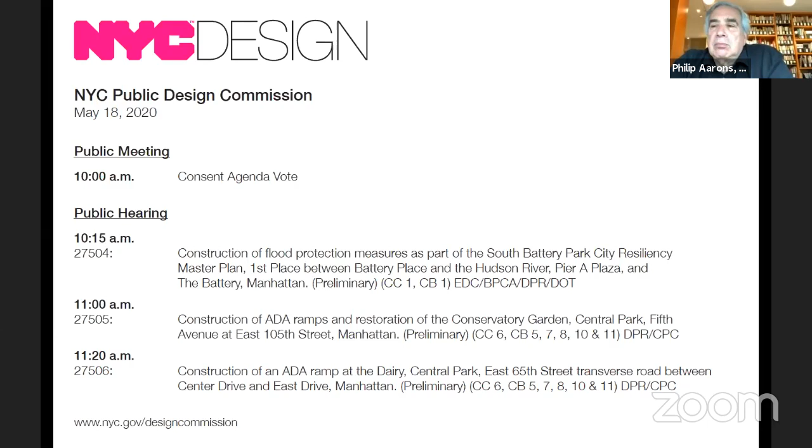So I will now go through another roll call for the vote. When I call your name, please say yes or no to the consent agenda. Phil, yes. Lori, yes. Manuel, yes. Richard, yes. Susan, yes. Ethel, yes. Merrill, yes. and Mary, yes. And I am voting in favor as well. So let the record show all in favor, and so the consent agenda is approved with the conditions and recusals noted.

So now we're moving on to the public hearing with item 27504, construction of flood protection measures as part of South Battery Park City Resiliency Master Plan. Commissioner Morgenthau will be moved to the waiting room as she is recused from this project. So per standard procedures, the applicants will give their presentation, then public testimony will be heard, and then the commission can ask questions, deliberate, and vote.

Hogan from AECOM, I've given you control of the shared presentation screen. Let me know if you see that. Yep, it looks like it says I have control. I'm just testing it out. There we go. Okay, yep, it works. Let me just, you have control of my mouse. Let me just mute myself again and then I'll give you control.

Can everyone else see this? It says, please move window away from shared application. I'm not sure. Is that on your end, Rebecca? I do not see that. Rebecca, do you have another window perhaps that's open on your desktop that's in front of the PDF? No, only the thumbnail of Hogan. Let's see. Let me minimize you and see if that works. Okay, it's showing on the live stream that there's an issue as well. Let me stop share and try again. Okay.

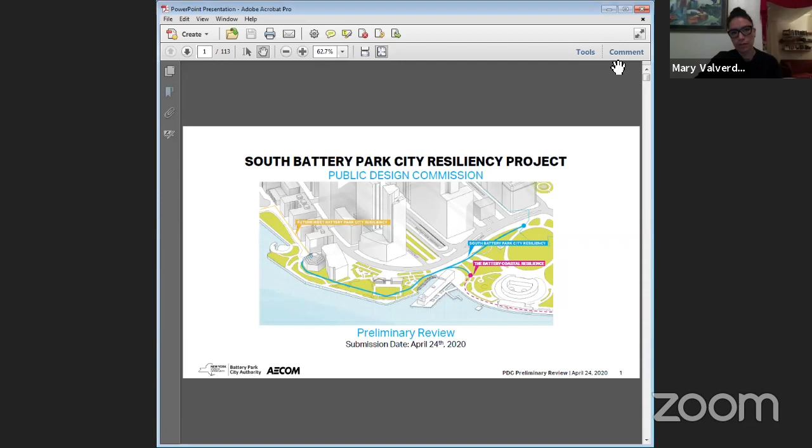Does that work? Does everyone see it? It's good. Okay. And Hogan, do you still have control as well? I think you have to give it to me again, just as I'm viewing. One moment. Okay, you should have control now. Okay, great. Let me just mute myself and then we are good to go.

Okay, well, good morning, everybody. My name is Hogan Edelberg. I'm a landscape architect with AECOM. I'm joined today by Jennifer Dudgeon and Gwen Dawson from Battery Park City Authority, as well as my teammates Heather Morgan and Luis Diaz, who are available for the question and answer period as needed. So we have a lot of slides to go through today, so I'll be moving relatively quickly.

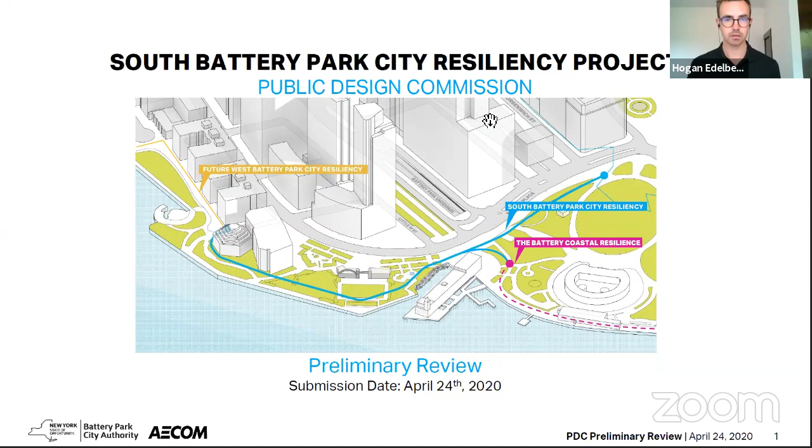So we'll be talking today about the South Battery Park City Resiliency Project. It's part of the Lower Manhattan Coastal Resiliency overall. You can see its location in relation to Lower Manhattan here on this slide. The South Battery Park City project extends into the Battery, where it connects to other resiliency projects, the Battery Wharf, and eventually the FiDi-Seaport Climate Resilience Master Plan.

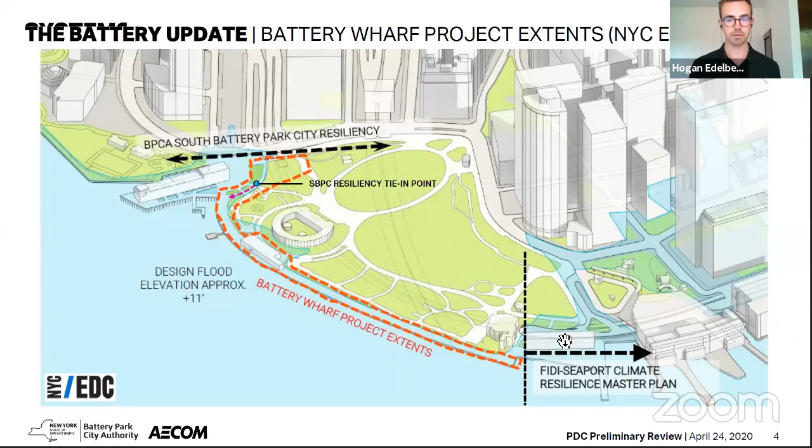Zooming in a little bit to the project location, we can see some of the main features: the Museum of Jewish Heritage, Wagner Park as it is today, Pier A, and the Battery on the right. Our project alignment is shown in blue here, and you can see the tie-in point for the Battery Coastal Resilience Project here.

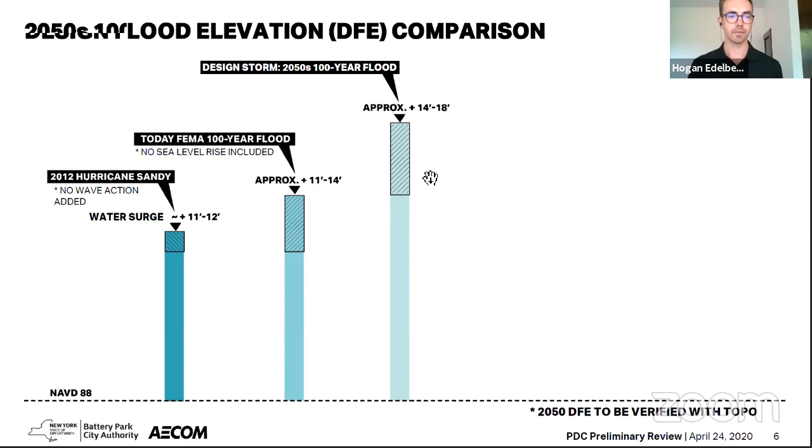So the challenge with this project that we'll be talking about today is how do we design for these risks, and how do community design excellence and climate adaptation coexist on this site. Obviously, there's a lot of factors that go into it.

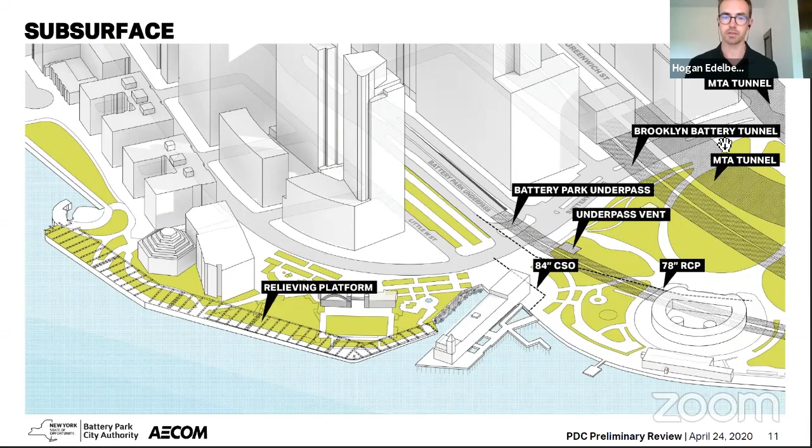Through Pier A Plaza, there is an 84-inch combined sewer outfall running just to the south of the Harbor House, the Battery Park underpass and the underpass vent, and further to the east, the Brooklyn Battery Tunnel and the MTA Tunnel.

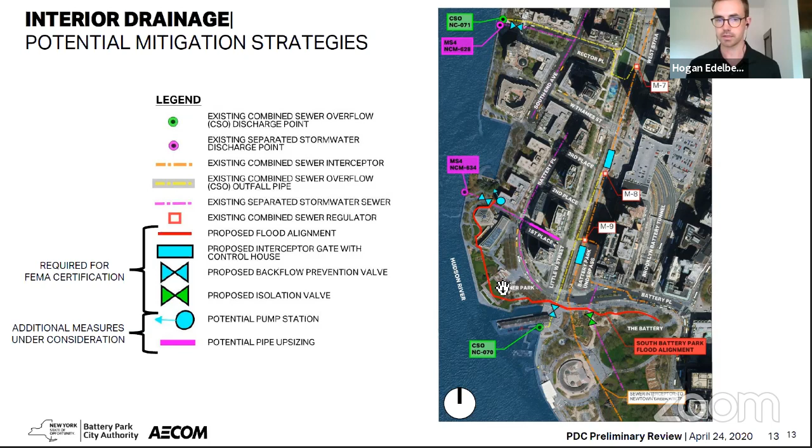As we are looking at the alignment through this area, we're also considering interior drainage. You can see here some of the mitigation strategies overlaid, including using backflow preventions wherever a utility has to cross the proposed flood alignment.

Now we get into the preliminary design, and I'll be walking through the site overall and then going through zone by zone. So as I mentioned, the 4 zones we have - the Museum of Jewish Heritage, Wagner Park, Pier A, and the Battery - are overlaid on the site here.

You can see the full design laid out in this graphic here. Today, the area we're going to be focusing on is highlighted in blue, which is the areas in PDC jurisdiction - first place along the Battery right-of-way, Pier A, and then the improvements or changes into the Battery Oval.

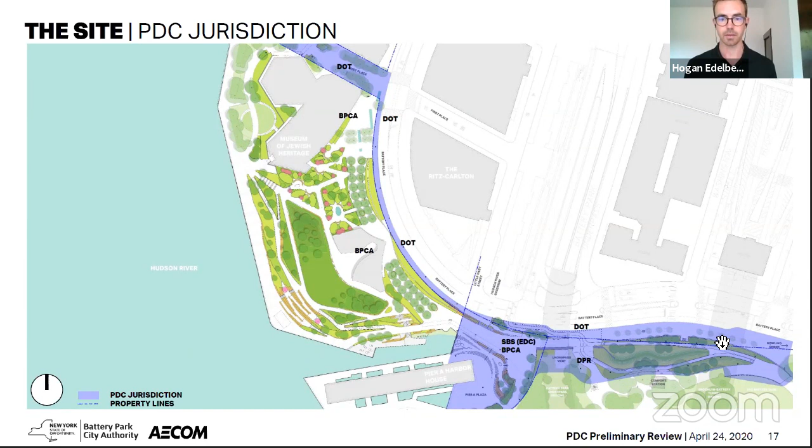The connections through this area - our design strategy maintains the existing pedestrian and bicycle connections and actually adds new ones in some cases. This area to the south of Wagner Park is a new connection along the Esplanade from Pier A Plaza. We're also maintaining direct connections all the way along Battery Place, either on the sidewalk or through the alleys, creating an open and accessible plaza in Pier A, and aligning the bikeway circulation to connect to the Hudson River Greenway. I'll be going through all of these in a little bit more detail in zone by zone.

Looking at the high level here, the flood risk measures and the DFE that go through the site. We start with the combination of flip-up deployables and a glass top flood wall in the Museum of Jewish Heritage in first place, running through Wagner Park, where our DFE is actually the highest. We elevate the park to bury the flood wall underneath it as part of our design principle to maximize the protected area. Running through Pier A Plaza, we're adding flip-up deployables and also raising the elevation 5 feet above existing grade, with the final DFE at the top of the deployables at 18.5. Then into the Battery, where we integrate a flood wall into a landscape berm before it terminates at elevation 15 at the Battery Oval.

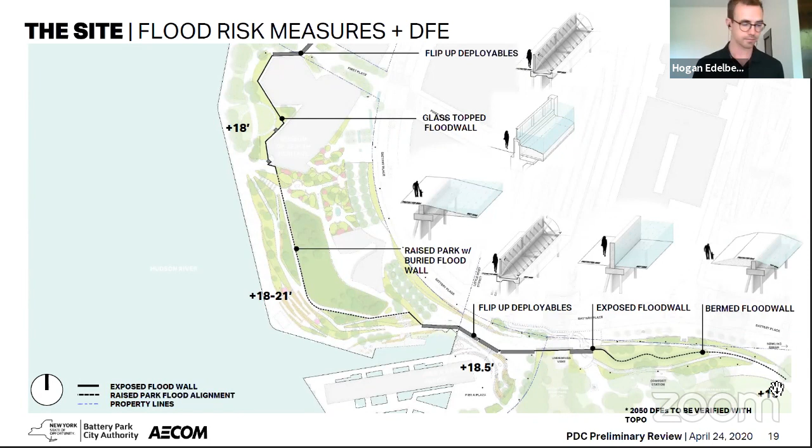As part of this project, we're also integrating site security. These areas to the north are going to be part of a separate project by Battery Park City Authority. But along the eastern side of Wagner Park and the northern side of Pier A, we are integrating security elements into the design in the form of K-12 rated walls, planters, and bollards running along the right-of-way.

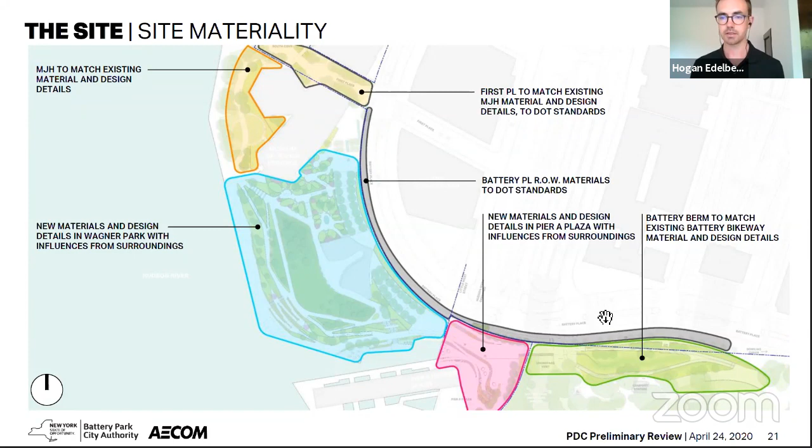Looking at a high level at some of the materials we're using here from north to south. In the Museum of Jewish Heritage in first place, our goal is to match the existing materials and design details as much as possible. In Wagner Park, we're taking inspiration from the existing materials and design details, but adding new materials to develop the design and integrate influences from the surrounding areas. In Pier A Plaza, the same strategy, and then looking into the Battery berm, where we're again matching the existing materials and design as much as we can.

Adding into that palette, we're proposing a cooler shade palette, Georgian gray and pearl gray or similar. We feel like that complements the existing stone in the Battery and the transition to the jet mist, which is used around the Museum of Jewish Heritage.

As part of the flood alignments, hydraulic power units will need to be installed. These are showing the ones within the area we're focusing on today. There's an HPU integrated into a planter in first place, and there are HPUs in Pier A Plaza, which control the various flip-up gates running through this area.

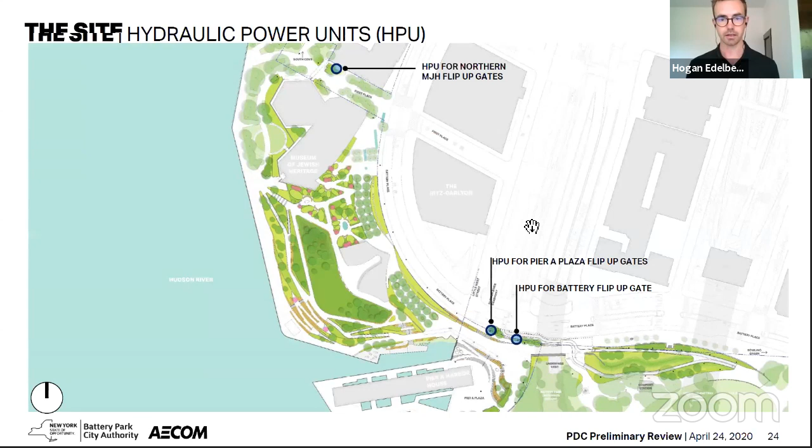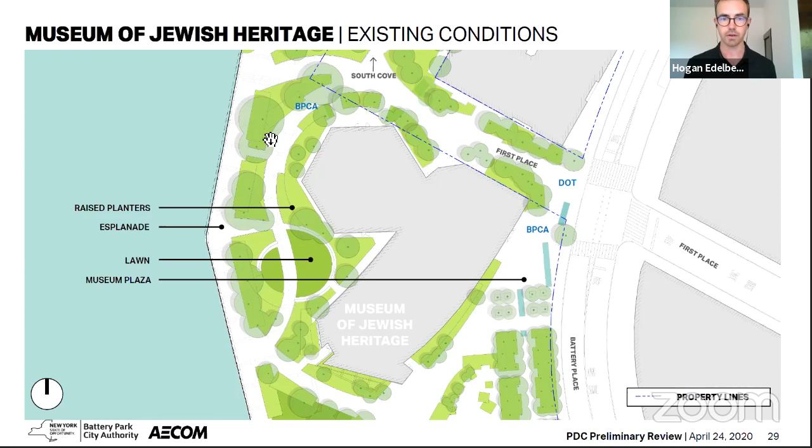The existing conditions here show that plaza we were just looking at on the right, and those planters wrapping around into first place. The proposed design has a very light touch in this area. You can see the flip-up deployables crossing first place, which continue around the northern side of the museum before transitioning to the glass top flood wall to the left. On the right, the majority of the plaza in front of the Museum of Jewish Heritage remains unchanged, and that temporary vehicle barrier will be replaced with a permanent solution as part of that separate security project I mentioned.

So looking at the structural engineering in a little bit more detail, the flip-up gates run across First Place and connect into a tie-in point here. This will eventually connect to the West Battery Park City Resiliency Project, but in order to get accreditation for FEMA, we are going to need to put in a temporary alignment here connecting to high ground at this point.

The columns that the flip-ups connect to are located outside of the lines of sight. You can see here there's one adjacent to the building, another adjacent to the Museum of Jewish Heritage. Those will be screened by planting, and then it connects to the glass top flood wall around to the left, as I mentioned.

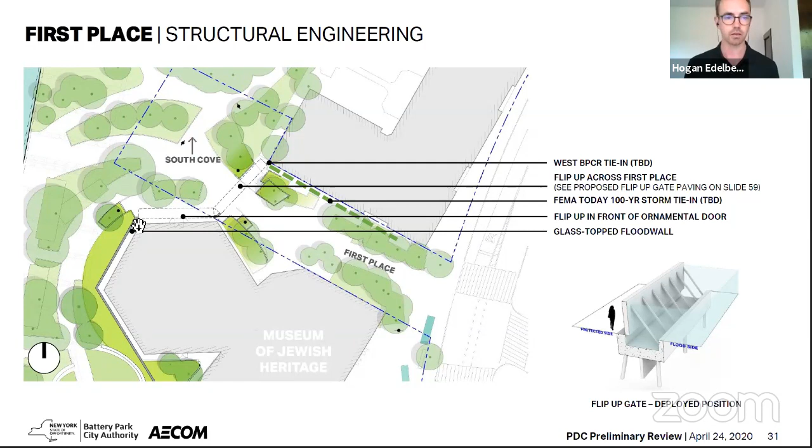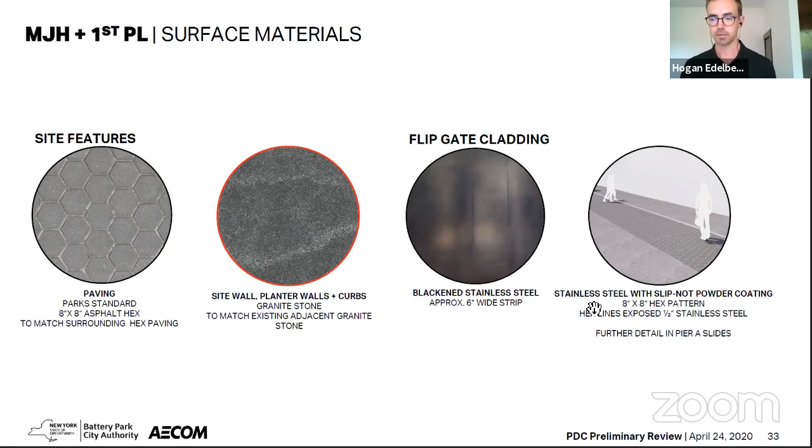And then the surface materials, you'll see this repeated throughout the project. We're using a continuous treatment for the flip-up gates wherever they occur. Where we're disturbing paving, we'll be replacing that with asphalt hex pavers. Where we have our granite stone, we're replacing that with granite stone to match the existing. On the flip-up gates themselves, we're using a non-slip powder coating finish, stenciled to match the existing hex pattern surrounding the flip-up gates when they're flush to the ground. We'll also use some sort of steel with a black finish on the side of the columns where the flip-up gates meet when they're exposed.

The lighting and signage in this area, again, is remaining very much the same. You can see in the lighter colors the light poles to remain, and in darker colors where they need to be relocated. The B shows just the B pole light, and the S shows the B pole light with a security camera. These areas show where wayfinding will be mounted to those light poles as part of the BPCA signage master plan.

So the palette for First Place—you can see the sign here that will be mounted to the B pole, that existing standard pole lighting, and then what it looks like when we have the security camera on that.

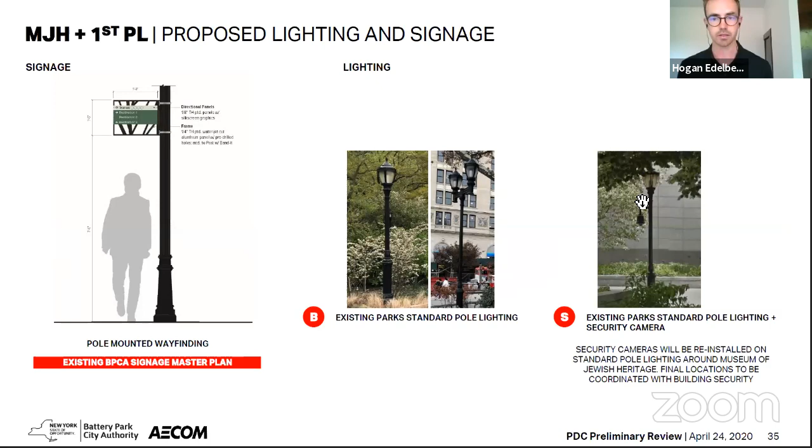The preliminary planting palette for the Museum of Jewish Heritage and First Place really blends in with what's out there today. It incorporates a native palette, salt tolerance, and embodies the Battery Park City guiding principles for landscape decisions, which focus on creating habitat and seasonality.

Okay, moving a little bit farther south to Wagner Park and Battery Place. The views here, looking north along Battery Place, you can see the allées on the left, and the view looking south through the allées to Pier A Plaza. This aerial view looks at the intimate gardens in Wagner Park, with allées leading into Pier A Plaza, and then north along the Esplanade in Wagner Park itself.

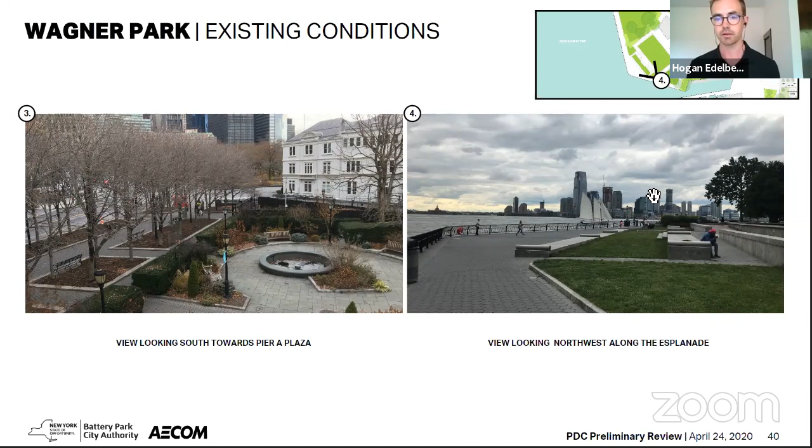There's public art in Wagner Park, as I'm sure everyone is familiar with. These pieces will be relocated within the new park design, both the resonating bodies and the ape and cat and the eyes.

Looking at some of the design inspiration from Wagner Park, we're really taking cues from the master plan principles—that lawn, the views, and the ornamental gardens that are out there today. You can see in this axon the overall design for Wagner Park with some key features called out. Focusing today on the Battery Place side, we have the Battery Place sidewalk, which is going to be 12 feet wide.

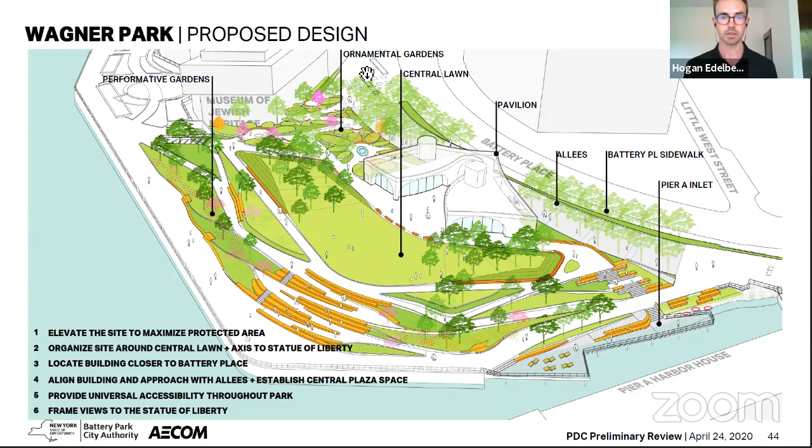And that planted slope leading up to the allées, which lead you from the Pier A Plaza elevation up to the pavilion, and then back down to the eastern side of the Museum of Jewish Heritage. Looking at this in plan, you can see those elevations marked here from the proposed elevation of 11 in Pier A Plaza up to the new park level of +20 and back down to +11. We've set those allées back from the right-of-way to provide enough area to create a planted slope to effectively screen that wall, and we do have some sections and views to show that.

And then we created a little overlook point here where we do have that service entrance on the ground level. This will be used only by maintenance vehicles being accessed from the sidewalk.

Pedestrian circulation does extend straight up over these allées from Pier A Plaza to the Museum of Jewish Heritage and connecting to Wagner Park here. We have that new connection from Pier A Plaza to Wagner Park in the south—that direct connection from the Esplanade to the plaza—and obviously maintaining that pedestrian access along Battery Place as well.

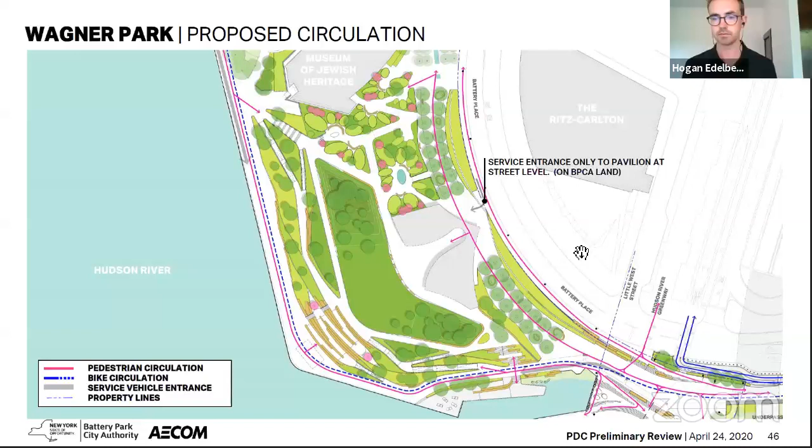Looking at it in section, you can see here the sidewalk along Battery Place, at elevation 9.5. The section cut is on the upper right, about 12 feet wide here. We have our planted slope.

Looking at the planting palette for this area, this is blending into the Museum of Jewish Heritage in the north and Pier A in the south. In addition to the qualities listed on this slide, these will be plants appropriate to be used on a slope.

So looking at the views here, this view, the key on the upper right, is looking south from First Place. The existing elements in the foreground are the fountain, the benches, and the trees, and then in the background, the allées sloping up to the pavilion.

That's going to be at elevation 20. You can see on the left here that 12-foot sidewalk leading you around to Pier A Plaza, which maintains clear access through this area, and that planted slope starting here in the foreground and extending all the way to the background there. The entrance to the lower level of the building is shown here.

As I mentioned, that's a service entrance, which is going to be used by staff and maintenance vehicles. There's two entrances to Wagner Park you can see in this view, one in the allées here leading up to the upper level. There's also opportunities to enter through the allées themselves, or you can enter into the northern gardens here, which are more ornamental and intimate.

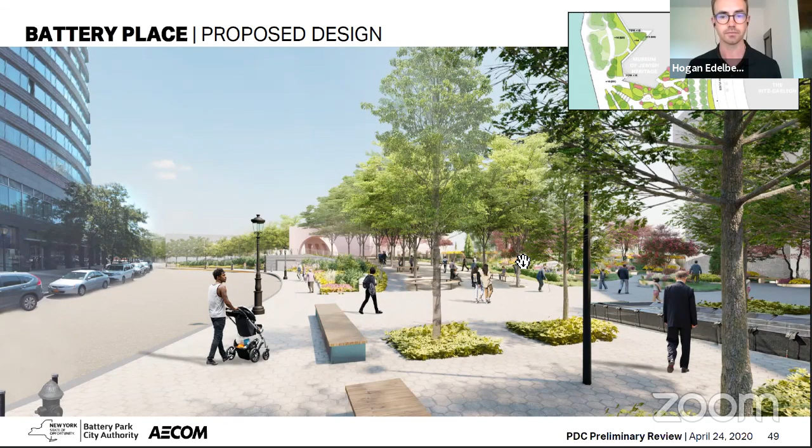And then another view illustrating this condition from the south in Pier A Plaza looking north. There's a couple elements here I wanted to point out. One is in the foreground, the flip-up gate. This is what it's going to look like when it's flush with that hex paving pattern, with the Slip-Not coating applied to it. This is the flood wall extending out of Wagner Park with that seal plate shown here in the foreground, and that goes underneath the park in the background.

The allées slope up with handrails on either side for accessibility to the park level in the background. And as the planted slope on the right gets, as the grade changes more from the park level to Battery Place, we do have a guardrail, which will start roughly here to provide fall protection.

The signage elements you can see here on the flood wall, I'll talk in a little bit more detail when we get to the Pier A slides. In this case, it'll be welcoming you to Battery Park City.

Okay, looking at the Battery and Pier A Plaza together for a second, just some of the existing conditions out there today. We wanted to show this all together because it really makes sense to look at these two areas first. So the dark blue is showing our flood alignment running through Pier A Plaza and the Battery and terminating here at the Battery Oval. That's going to be at elevation 18.5.

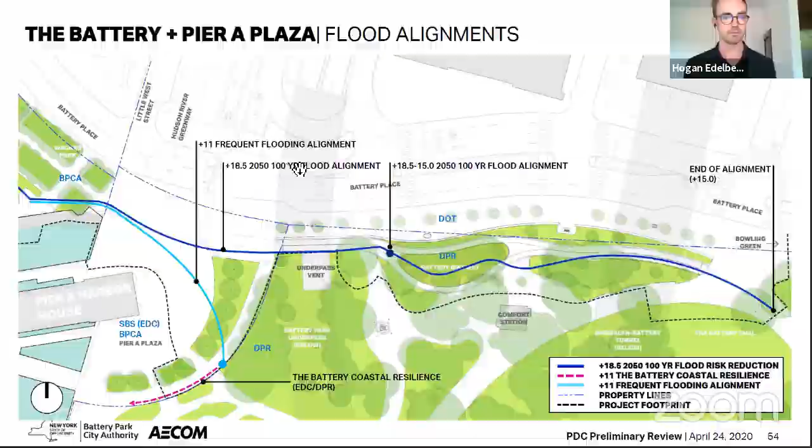So looking at Pier A Plaza, some of the existing conditions, the Harbor House and the bikeway. Looking at the views back to One World Trade and some of these temporary security elements that have been placed around the perimeter. The existing condition is a pretty open plaza. There's pedestrian circulation, bicycle circulation, and service vehicles coming into this area.

And what our proposed design does is really try to accommodate all of these circulation elements, maintain that flow, while integrating a number of other things that I'll go into more detail on in a second.

So you can see here, there's a series of gentle sloping pathways and stairs with seating elements integrated into them, providing universal accessibility to every place where we do have seating. There'll be clear access to Wagner Park in the north and the allées right here, as well as clear direct access to the Battery Place right-of-way shown here.

Overlaying the circulation, you can see how some of this stuff works. There are two things to point out. One, to maintain a clear open plaza and ensure pedestrian safety is considered, we're moving the bike circulation all the way to the curb and separating it. The solid blue lines indicate a separated cycle track, while the dashed blue lines show a mixing zone, where pedestrian and bicycle circulation crosses.

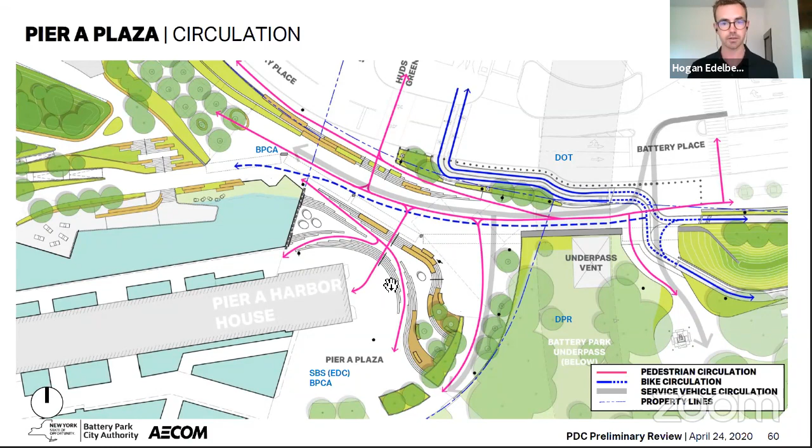This slide shows some of the main features called out. The last thing I wanted to point out is this space for an emergency vehicle turnaround. We've coordinated with FDNY to provide adequate space for a T-style turnaround for a fire truck or emergency vehicle in the upper plaza. They've confirmed that's adequate to access Pier A Harbor House—they don't need access to the lower plaza itself.

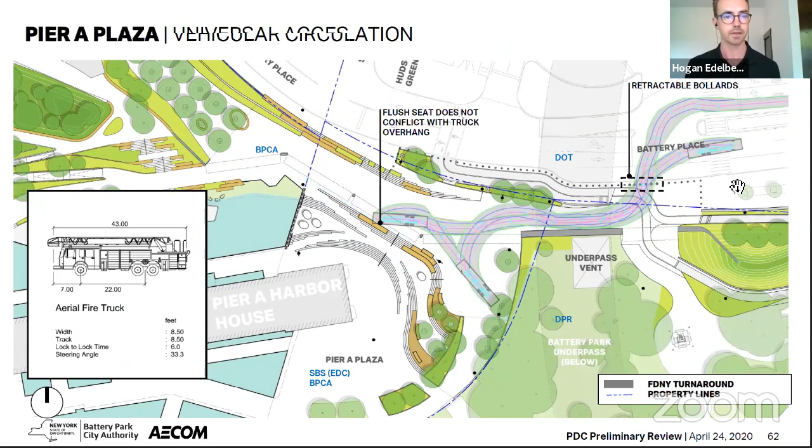These bollards are retractable, shown in red, to provide emergency vehicle access to Pier A Plaza as well as occasional truck access to the battery. Here you can see the truck access, or emergency vehicle access, overlaid on the site—coming in from Battery Place through those retractable bollards and turning around in the plaza.

And then the resiliency projects—I think I went over this on a previous slide.

Regarding subgrade conditions, the main one is this 84-inch combined sewer overflow which runs through the plaza. That's low enough that it doesn't conflict with the foundations needed for the flip-up gates and columns running through the plaza. We've also highlighted here where the root balls and footings for the HPUs will be located.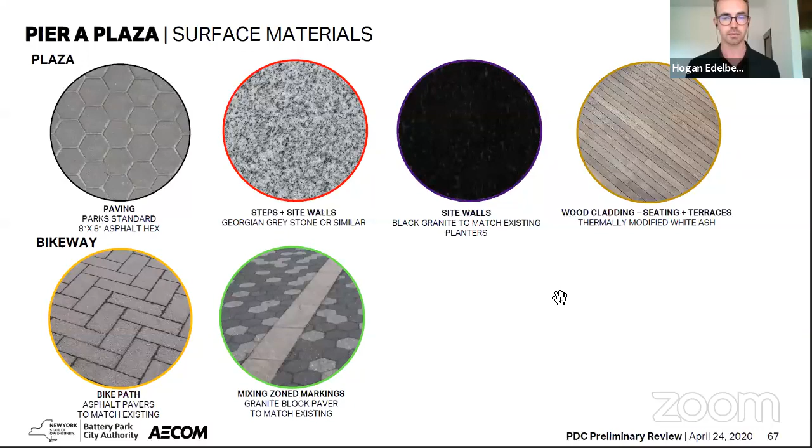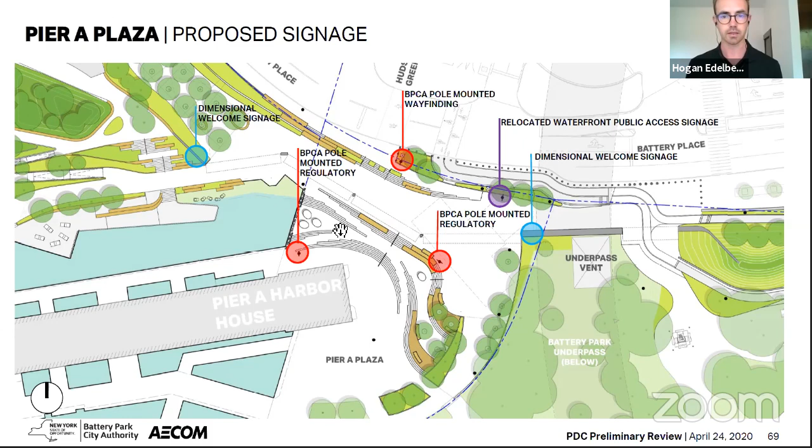Looking at those features in our schedule, the elements from the BPCA signage master plan would include one of these regulatory signs—not all of them, depending on what's required out there—plus that wayfinding element on the street side and the waterfront public access signage.

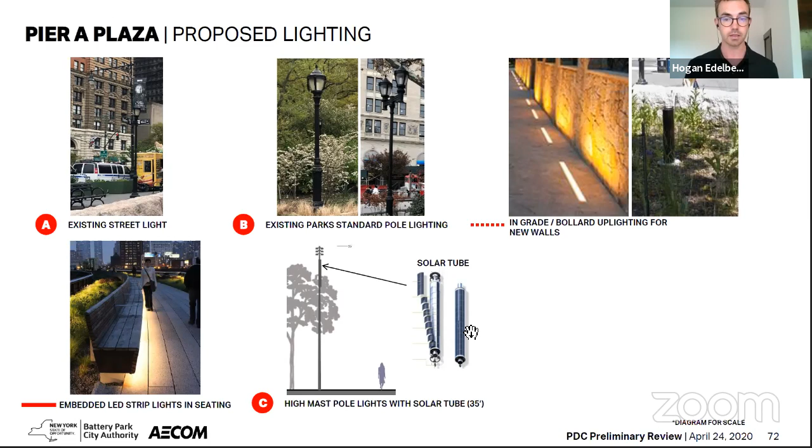Here's the schedule for these: the street lights, the B pole, and precedent images for what the in-grade lighting might look like. We're actually considering something more continuous, set in a trench, for ease of access and maintenance. There's embedded LED strip lighting in the seats, and these high mast poles shown at their correct height of about 35 feet. We're also studying integrating solar collectors in the shape of a tube onto these, as well as smart pole technology if we need to integrate security elements.

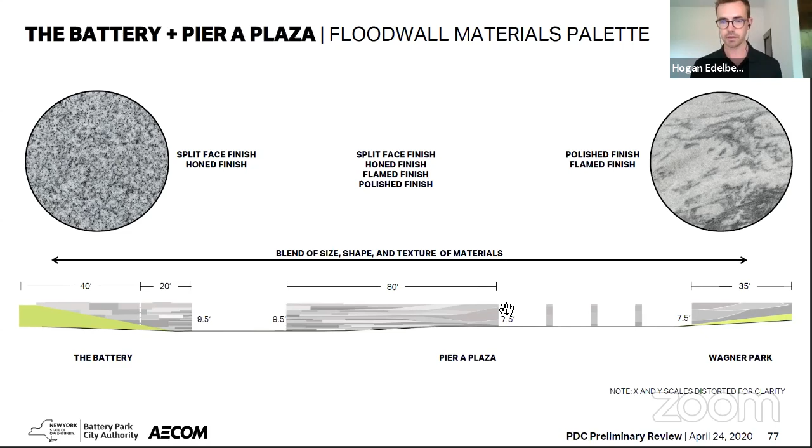This elevation isn't exactly to scale, but you can see the heights here go from 9.5, where we have a lower elevation, and then the height of the elements in the Plaza is 7.5 feet, where we have a higher elevation.

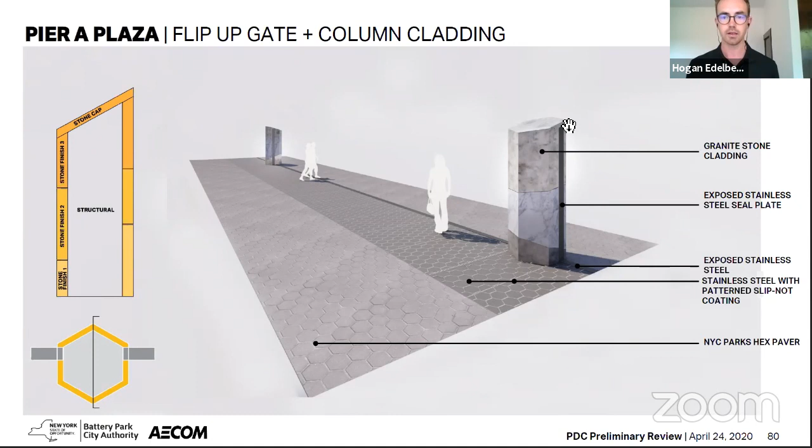This vignette is just showing a little bit of design development of how these will start to shape up. The granite cladding shown in this image is just representative of the design intent, but it's not the actual cladding we're intending to have. We'll have a combination of different kinds of stones, and you can see that steel plate on the side here.

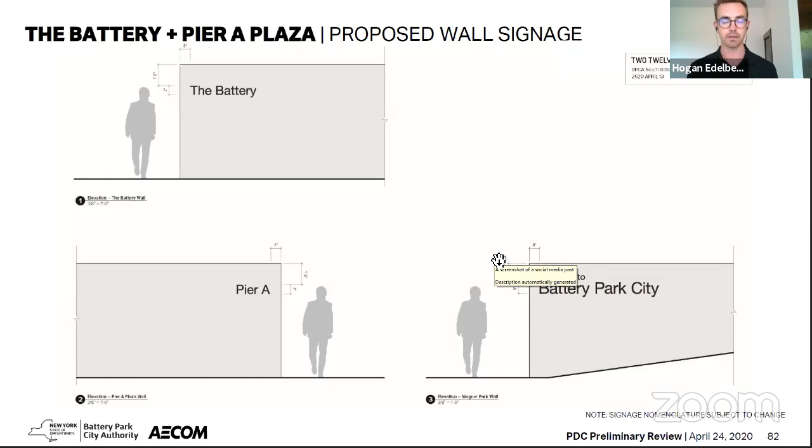Looking at that elevation again, where the signage would be located—welcoming you to the Battery, to Pier A Plaza, and to Battery Park City. We've worked with the signage consultant who developed the BPCA signage master plan to integrate that character into these signage elements. We're planning on using an inset dimensional sign, something to match some of the other metal elements on site, a black stainless steel, and insetting that into the stone will reduce opportunities for vandalism and increase its longevity.

These furnishings running through Pier A Plaza will be thermally modified white ash, as I mentioned. We've been coordinating with manufacturers to ensure we can steam-bend the planks in the radii we're showing to achieve the design intent. So we have these planks running lengthwise, and we integrate skate deterrents either in the form of this precedent image shown here or through the integration of armrests.

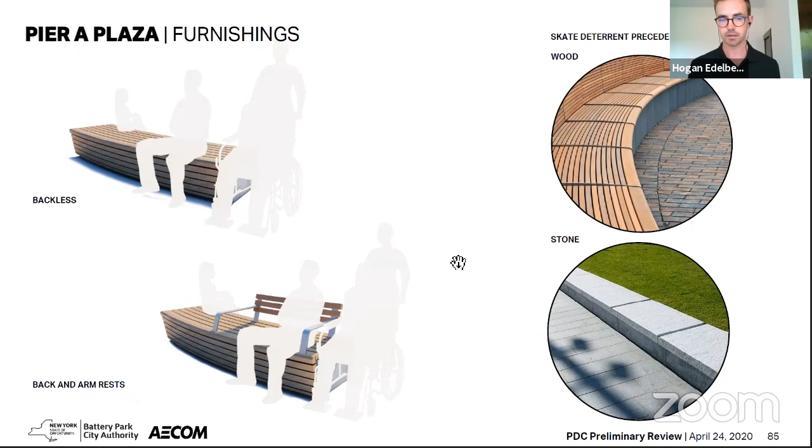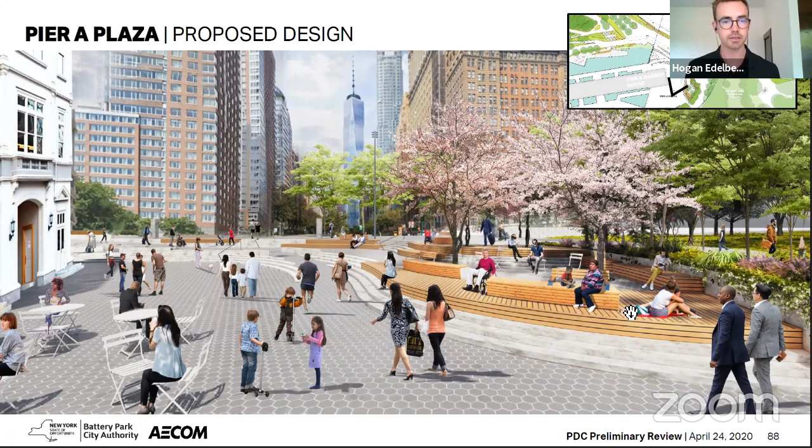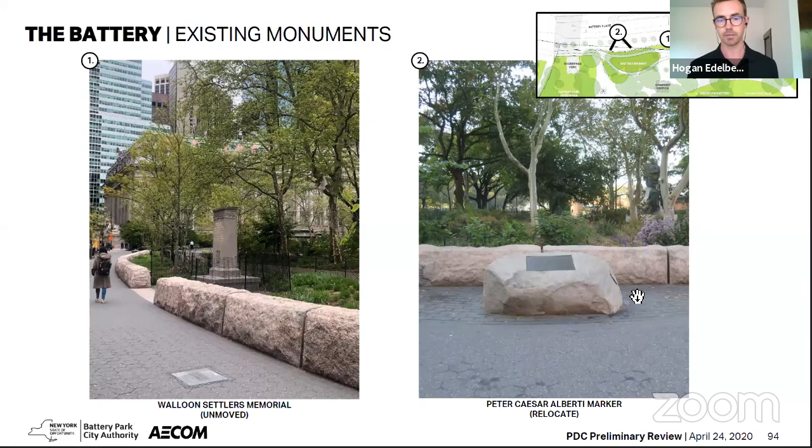You can see here the existing locations for these. The Walloon Settlers Memorial, we're not going to move. That will remain in place, but we do need to relocate the Alberti Marker from its current location here, and we have a render showing where that will go.

And you can see on these next slides here, the circulation. So we do have our bike lane running along on the north and south sides of the flood alignment. The mixing zone here on the left, moving into Pier A Plaza and Hudson River Greenway, and giving enough room for anyone who would like to turn around and access the comfort station or go into the battery.

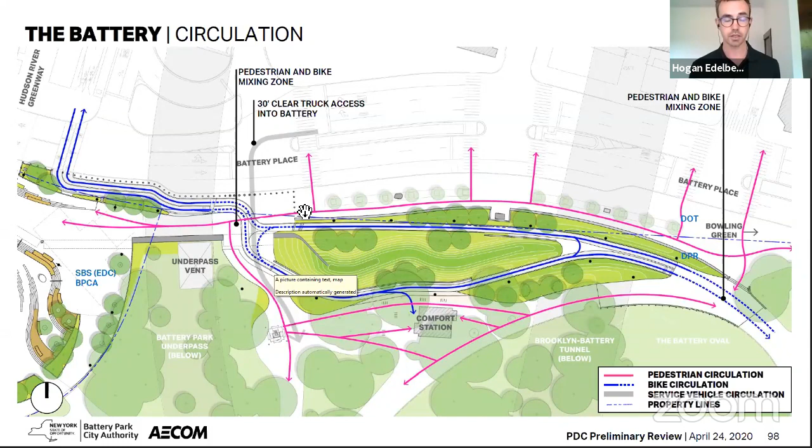This area here has a couple competing interests. We do have both pedestrian and bicycle circulation moving through this area, as well as the occasional truck, which is required to access the battery. We want to maintain a safe condition here and maximize the sight lines as all of these elements are moving through.

Just calling out some of the main features. You can see in the gray, like I mentioned, the wall spanning the tunnel and the wall exposed as the berm. Those will be connected by a flip-up gate. The battery berm, in an effort to minimize its footprint, we're proposing a 2-to-1 slope from the top ridge here down to the base. That'll be a stabilized slope. The plantings, as you'll see, have been selected to really provide that stability, as well as the geofibers, which we're mixing into the soil media.

And the proposed location for the Alberti marker here, which is going to be within that sort of paving median, in line with the Salvation Army monument up here. The Walloon Settlers Monument is unmoved, as I mentioned.

Materiality, the slide is a little bit jarring, but the materials are actually just what's out there today. The combination of the bike path paving in orange, shown in purple, is the edging, which is a granite block paver, I believe, which provides kind of a swale condition and prevents that stone dust from migrating onto the bikeway, or in this case, onto the flip-up gate. Where we have blue, this is our sort of turnaround paving, giving people the opportunity to access the other direction. And then shown in cyan is the Stony Creek granite walls, which currently edge the bikeway and the battery today. We're maintaining that and also adding new Stony Creek granite walls where we need to hold in the base of that berm.

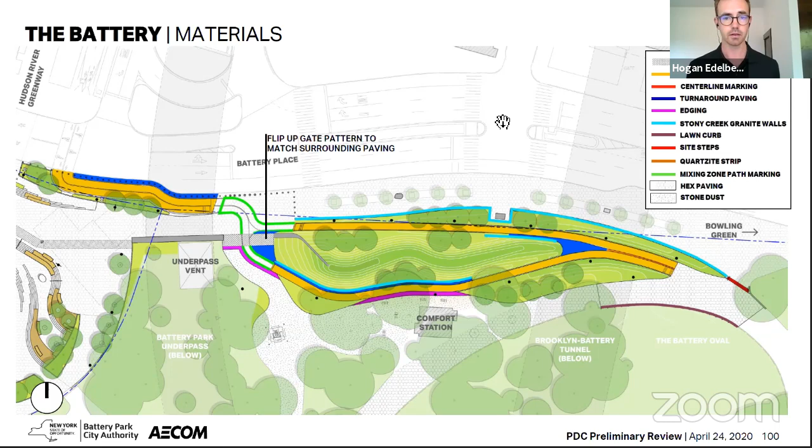So you can see those features here: concrete pavers, the stone dust edging, that hex paving, the site walls and the Stony Creek granite, the centerline markings, the mixing zone markings. Basically, what's out there today, we're going to use the same palette and replicate that as much as possible.

Okay, so for signage, there's a number of signs out there today. There are the signs integrated into the pavement, which are directional. There are vertical signs, the Manhattan Waterfront Greenway signage, as well as new signs that we're proposing: the dimensional welcome signage, and relocated park banner signs, which are just being moved slightly to the east to allow for the bikeway to move through this area.

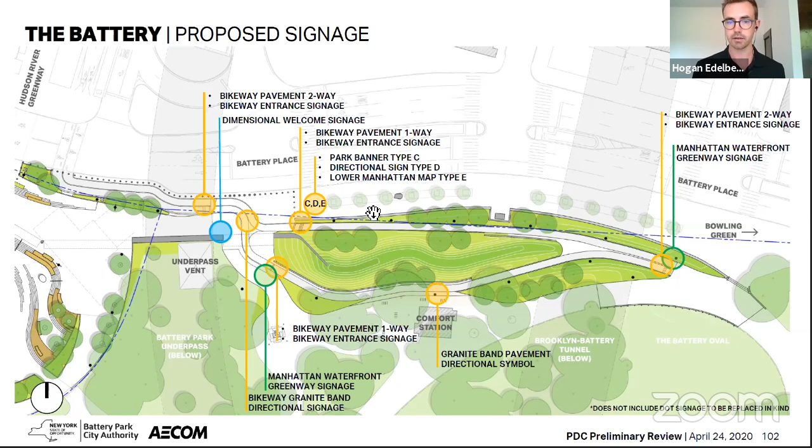You can see what those are here. So the signs that are integrated into the ground plane here, 1- or 2-way signage in that directional symbol, the park banner signs, which are just shifting slightly east, and then those vertical entrance signs at the beginning and end of the bikeway and the Waterfront Greenway signage.

In terms of lighting, we're maintaining the existing character. This is showing the proposed lighting, the new B pole lights along the bikeway, providing adequate illumination along that stretch. And the existing street lights along the curb will remain, as well as the B poles in that paving median. And you can see those features here, and the overlay of all of them together.

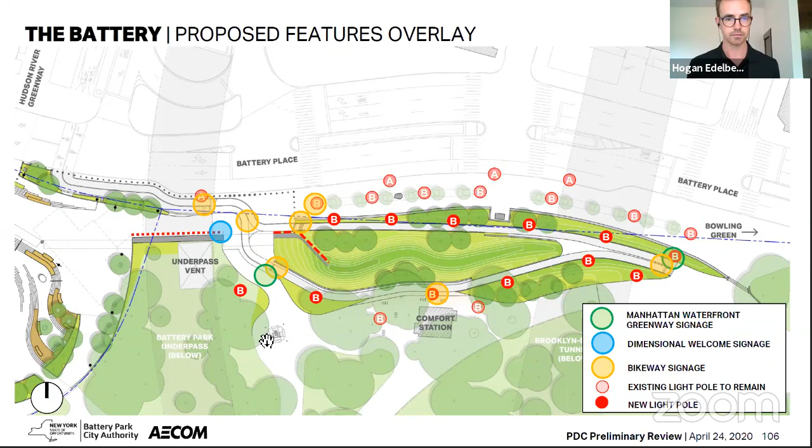The proposed design: in this view you can see the Walloon Settlers Monument where it is today, and the new location for the Alberti marker in that paving median.

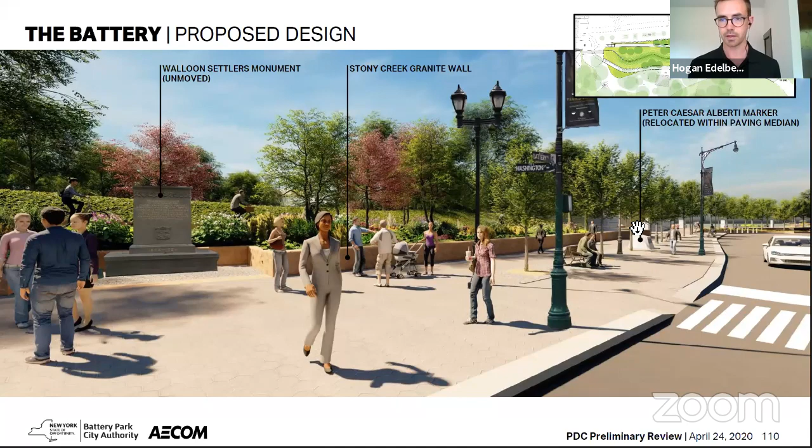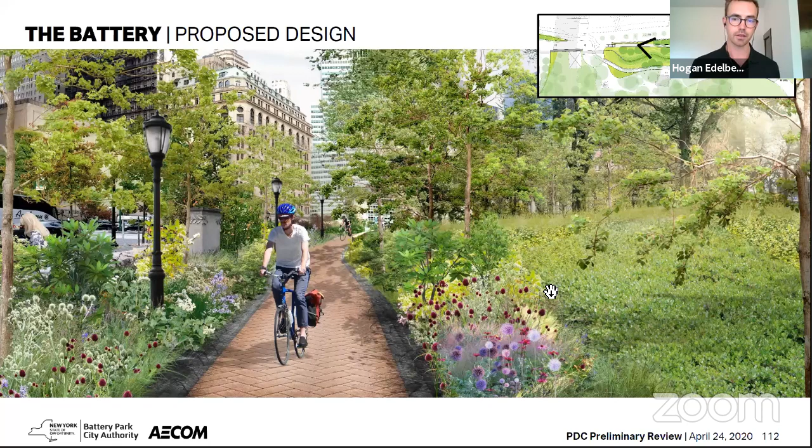Looking the other direction, along the northern bikeway, the Walloon Settlers Monument is on the left. Then we have that lush planting in the foreground where we can plant larger trees and shrubs, and the lower planting moving up to the top of the berm on the right.

And that's it. Thank you very much.

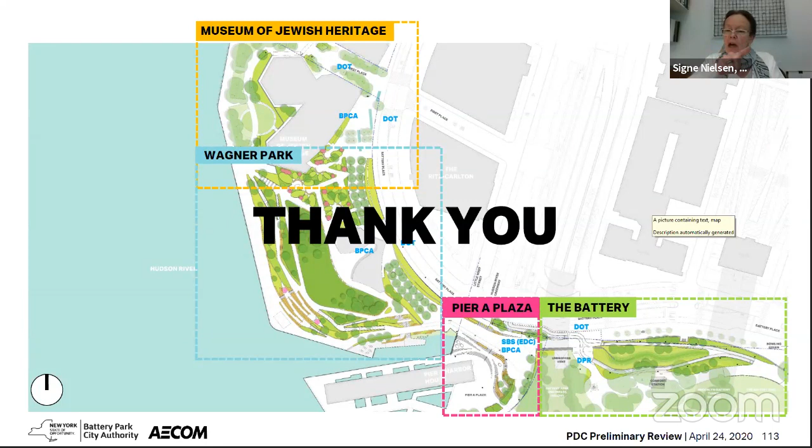And then, following on in that same area, the bollard line does kind of sinuously follow the bikeway as it begins to head east. And then there's the removable section, and then there's this weird, just straight rectilinear part. I'm just wondering why that can't become a little bit more sinuous as it terminates on the east. I think I'll stop there.

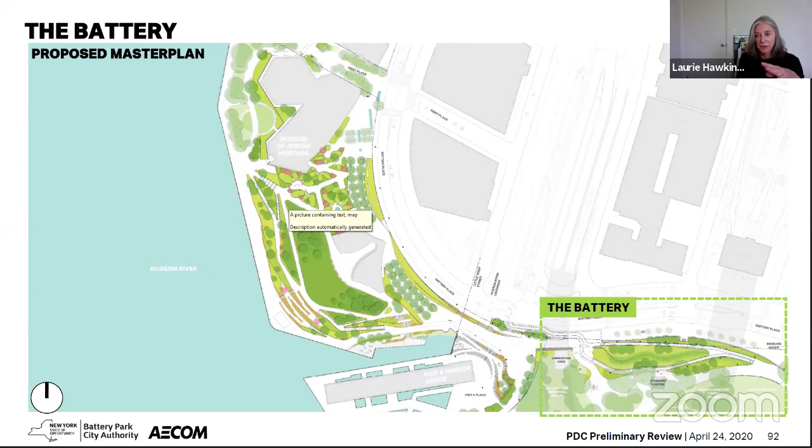So I had some questions. I think this is a very complex area and you're working with a lot of constraints, which is the name of the game here. I would also like to know more about the green in front of the pavilion moving forward, more details about the section through that and its relationship to the pavilion as you develop the project.

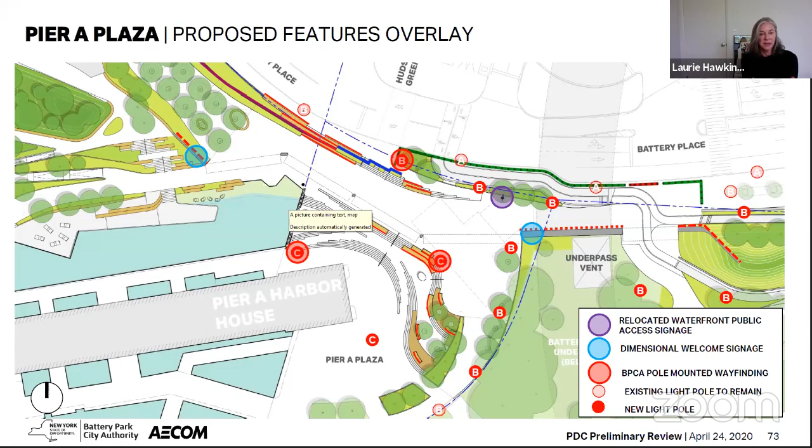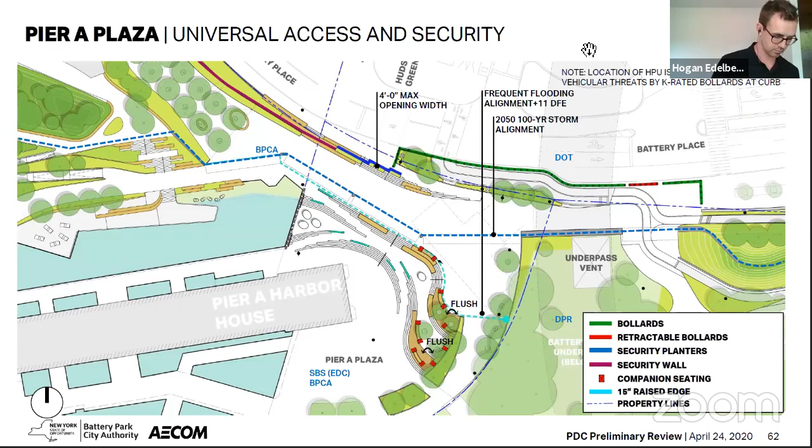But I wanted to focus on the seating area behind Pier A there. You have an extensive amount, and I know this is the trickiest area. It's not that they don't have a lot of tricky areas, but you have a lot of section here that you're trying to accomplish with seating and circulation and all kinds of fire trucks and various things going on. So I'd look forward to seeing more detailing, and I know this is preliminary, on all of this seating that you're showing, particularly the wood seating and the way it meets the ground. The one you showed as an example previously, just a bit north before you get to the Jewish Heritage Museum, is a different design, right?

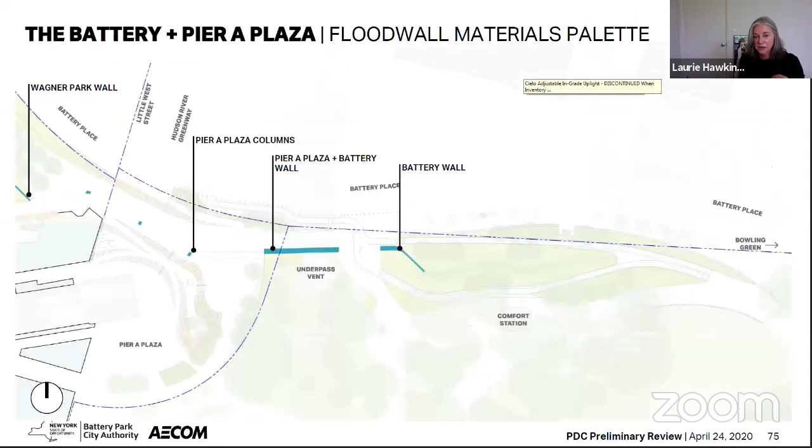It's held off the ground. So what you're showing is something that's basically turned up, but the boards are going north-south, or horizontally. So I have a lot of questions about how that's going to hold up over time and be detailed in a way that will last and be elegant, together with this lighting you're proposing underneath it. There are a lot of questions about that, from areas you lie on to areas you're sitting on.

So this is the one, this is the precedent, I guess, and you showed one on an end. There was an end image of one. This photo, yeah, the two images on the left of this slide are indicative of the proposed design. These are renderings. I'm not exactly sure which other one you're referring to, but we can flip back and look at it.

I think those are great comments, and that's exactly what we've been working through as well. It's just how exactly does that light get integrated into this bench, ensuring we can have the angles we want while maintaining a thickness of the wood to give it durability. I think what we're looking for in this area is a bench that meets the ground as close as possible. We're studying right now what it looks like to actually integrate the light a little bit higher up, so it provides more of a glow and less of a glare so close to the ground surface.

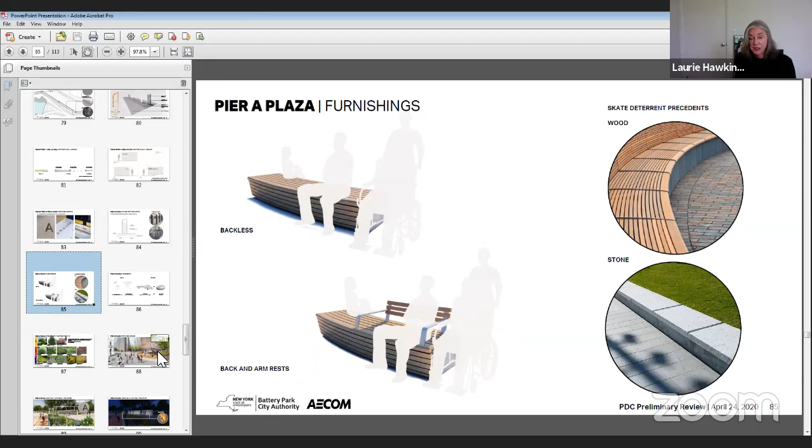And these will be built around concrete foundations for durability. But you said you're looking at one that doesn't meet the ground so closely, or does? It does. I'm just saying the image here in the rendering is showing the design intent that we wanted to meet the ground, so that in Pier A Plaza we don't have any opportunity for people to get underneath the bench -- these will be solid elements. But when you show the rendering, the wood goes very close to the paving, and you're going to have water there and things coming up at various times. This rendering is just an approximation, I take it -- very schematic.

So this rendering is showing a couple of things. There are three steps in the foreground leading up to the wood terrace, which is the larger wood feature, and that is flush with the paving behind it, built into the terracing. Then we have our raised seating elements shown here, which continue along. The lighting is only integrated into these raised seating elements, which would be a little bit off the ground.

Okay, well, I'm just concerned that there's one that's a step and one that's a bench, so they're different, right? Correct. And especially the lower one is also very vulnerable right there. So I just think you're going to have to be careful about how that gets detailed and how close it gets to the stone. I know I'm honing in very specifically on one area, but this has a huge effect on this open area right at Pier A, and how it ends up ultimately looking, because you've got a tremendous amount of this in this area of the project.

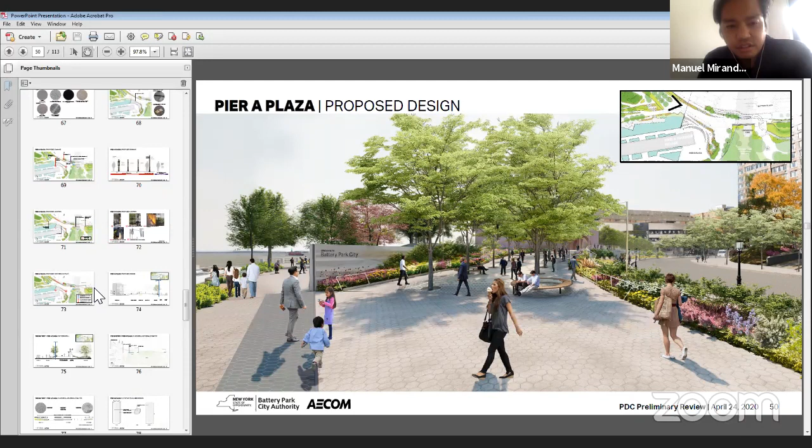The one with the kind of gray elevations. Let's see, what was that? Yeah, I think this one or this one? 82, yeah. So this to me...

The battery in Pier A, it's a little less clear that that's labeling amenities, whereas Battery Park City is the name of a neighborhood, something a little bit different. I think it starts to make a statement about identity of the neighborhood, so that's the point I want to emphasize.

So thanks for saying that you'll consider it. Yeah, definitely. And I know Jenny and Gwen are on the line. I don't know if you'd like to chime in on this one, but it's certainly something we discussed with the signage designers, just what this says, and I think we can take back to them. But I'd like to also give Jenny and Gwen a chance to say something to that if they'd like.

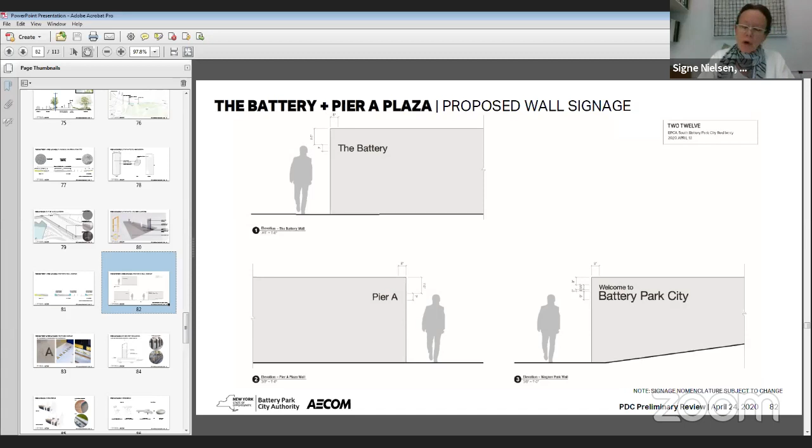So now we are moving on to two projects that are going to be shown together but voted on separately. That is item number 27505, construction of ADA ramps and restoration of the conservatory garden, and item 27506, construction of an ADA ramp at the dairy, both of which are in Central Park. This will be a single presentation, but a separate vote on each, and we may or may not have testimony on one or the other or both. Please begin, whomever is presenting for Central Park Conservancy.

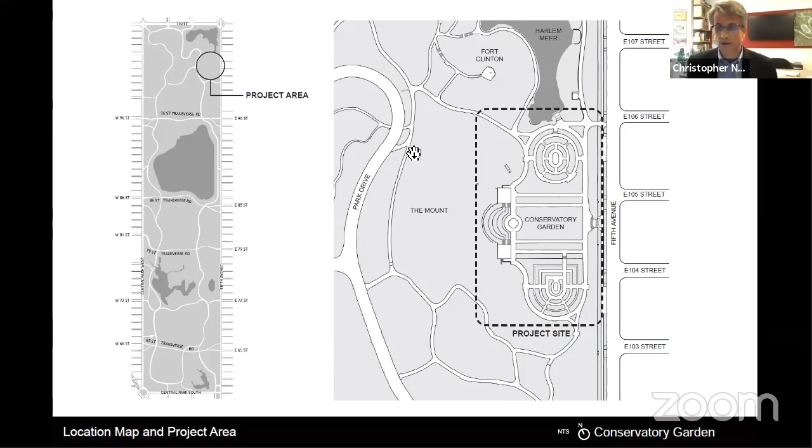So on the timeline, the site of the garden was originally conceived by Olmsted and Vaux as part of an informal arboretum that was never realized, and the landscape actually functioned as a working landscape from the construction of the park through the late 19th century. It was actually a nursery. There were actually greenhouses built. And at the end of the 19th century, in 1899, a public conservatory was constructed. That conservatory was actually very short-lived, and by 1920, had fallen into significant disrepair.

In the mid-1930s, opening up in 1937, the conservatory was demolished and the conservatory garden was constructed. In 1969, there was a major repair project done in the garden, primarily focused on pavement work. The outer path's bluestone was removed and replaced with concrete. So from 1969 into the 1970s, the garden's horticulture in particular suffered in the fiscal crisis. In the early 1980s, the garden was restored by the Central Park Conservancy, an effort really led by our trustee, Lynden Miller. That project actually primarily focused on the horticultural restoration of the garden.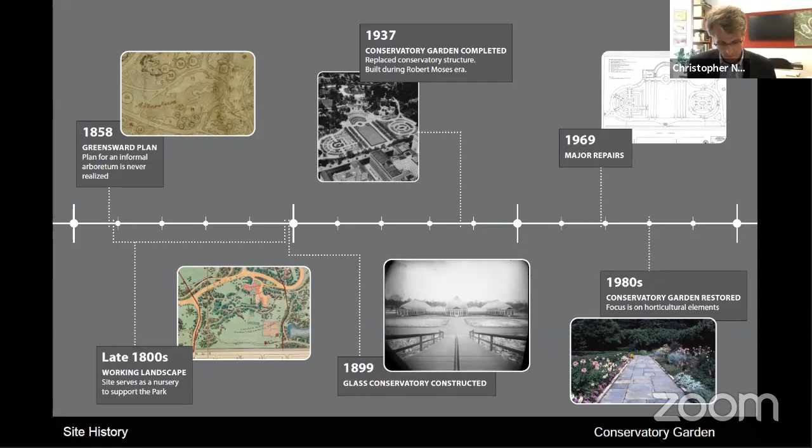So the garden was designed by Gilmore Clarke and Betty Sprout, landscape architects. It's designed as a formal garden with 3 central garden rooms: in the center, the Italian garden; to the south, the English garden; to the north, the French garden; and up on the west side of the site, a terraced slope up to a pergola with 2 utility buildings flanking it on either side. Those utility buildings are actually remnant and were reconstructed. They were actually in the footprint of elements of the old conservatory.

Our proposal is essentially in-kind restoration with some accessibility improvements in the garden, on the north side, the French garden, which is a sunken garden. It'll include removal, reinstallation, and replacement as necessary of existing bluestone, replacement of the concrete, repair to stairs, the pergola elements, and infrastructure replacement across the garden. There will be some accessibility improvements in the French garden.

It is the only one of the 3 garden rooms that is inaccessible. It is our intent to make it universally accessible. The pergola area to the west side, deeply terraced into the slope, we have determined is infeasible to make accessible through a site intervention, which is the current scope of our project. We'll make that area accessible through interpretation.

And as we look to renovate the 2 utility buildings, we will evaluate the ability to create a lift in one of those, and the potential for that in the near to midterm future, to make the pergola area accessible.

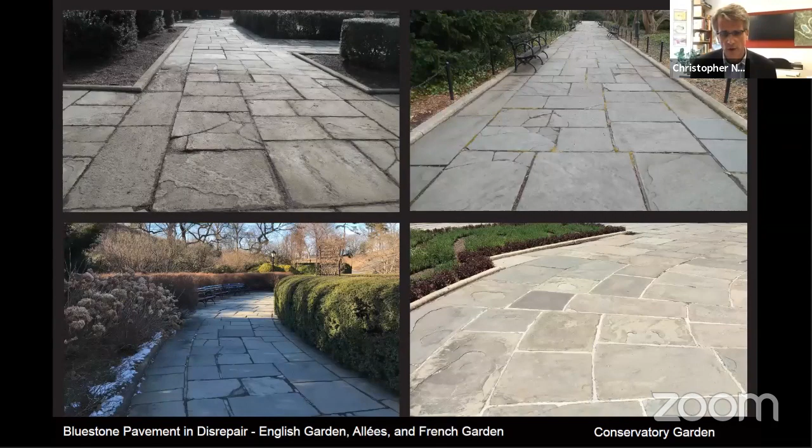You can see there's remnants of about a 15 or so year ago project where we modernized the irrigation system. That pavement is in poor condition, and it is our intent to replace it with the historically documented bluestone.

Walls, brick and bluestone coping walls throughout the garden will have repair work done to them. There's some cracks where there's inadequate back drainage behind the walls, and repairs will be made. There are some small sections where the walls, particularly this cheek wall along the staircase, which is heaved out, will be salvaged as much brick as possible and reconstructed with salvage materials so it's plumb. Handrails will be added to the steps as required.

Up on the pergola, again keeping with much of the project, there will be repair work and replacement in kind as necessary if the extant material is not in suitable condition. The pergola dates to its original construction, of steel construction, black painted steel. There's significant rust jacking at joints, and members have deteriorated significantly. It is our intent to disassemble the pergola as necessary to replace elements, scrape and paint steel that can be salvaged, and replicate all the detail in kind.

I should note that the wisteria that grows up on the pergola will need to be cut back to accommodate this. You can see it's intertwined into the joints. That's an unfortunate reality of making the necessary repairs.

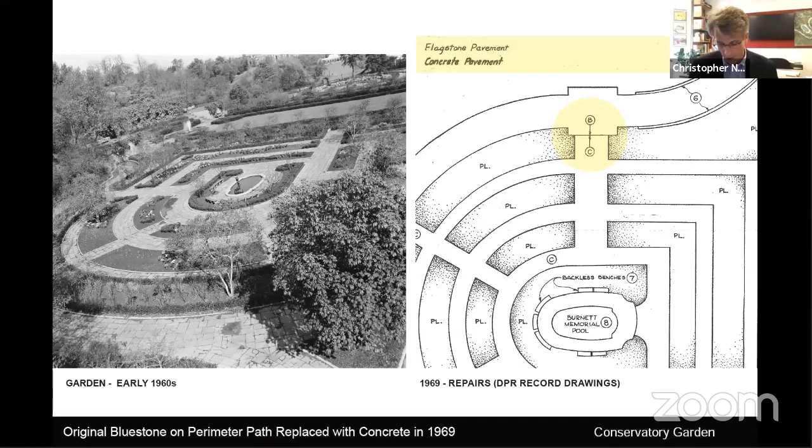This brings us to the accessibility improvements in the North Garden, the French Garden. Its central element is a sunken area down to some parterres with a beloved Untermyer fountain. This is probably the most significant change in our project, creating accessibility into this sunken area.

There's about a 24-inch grade change between the outer path and the lower garden area. The area is bound and defined by its horticulture, the ilex hedge that goes all the way around, and 4 points of entry.

We have to manipulate the grades modestly. There's about a 4-inch lowering of the outer path needed to create the width of the plant bed, about 22 feet. At 20 inches, we can make an accessible route.

The big design decision for us was whether to make one, some, or all of the points of entry into the garden accessible. It is our proposal to make all of them accessible. I'll go through some technical reasons that led to that decision, which align with our interest in maintaining the symmetry.

Each of the entrances to the lower garden area are defined by horticulture, again roses on a simple steel trellis with cheek walls to support the steps.

As I mentioned, there's existing about a 24-inch grade change between the outer ring and the lower path. We have to lower that to be 20 inches, which means these steps cannot remain in their existing configuration. We'll have to lose a riser, lose one tread essentially, and then reconfigure the riser ratio so they would not remain as they exist.

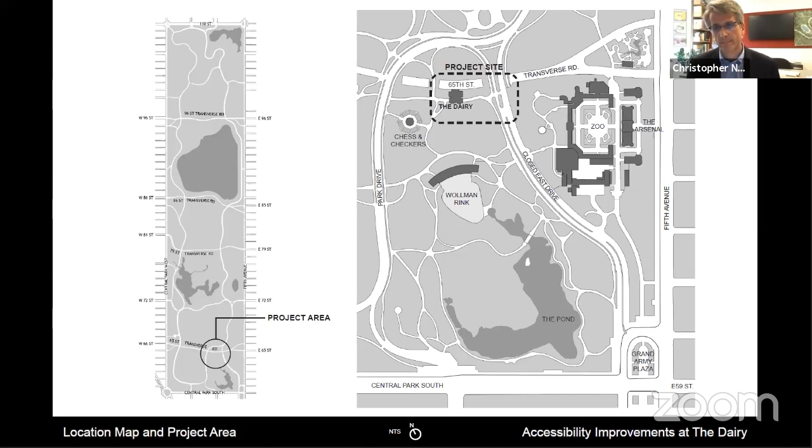This is a pretty straightforward project. Historically there's a relationship between the wide, basically a 14-foot path that goes down the slope at a straight line grade to the loggia. That loggia was actually lost at some point in the first quarter of the 20th century. In the early 1980s restoration by the Conservancy and Parks, the big thing was to recreate that loggia. The relationship of that path has essentially remained as it is historically, and the relationship between the width of that path as it meets the loggia is something we gave very careful consideration to.

There's a straight line grade - the path is about 14 feet, and there's a relationship in terms of making it accessible between where the path meets and the relationship of the accessible route to the dairy and that crosswalk up on the Closed East Drive.

It is our proposal to modify the radius of that path, maintain its straight line grade and historic width at 14 feet, and relocate the crosswalk a little further south on the Closed East Drive, which from a grading perspective is important for accessibility improvement. It also creates a cleaner geometry as a point of access.

That all gives us enough width to create a 60-inch wide accessible ramp on the north side of the path, separated by a 9-inch curb. You need the curb between those two to modulate the changing grades between the straight line grade of the path and the grade of the ramp, which requires 1 in 12.

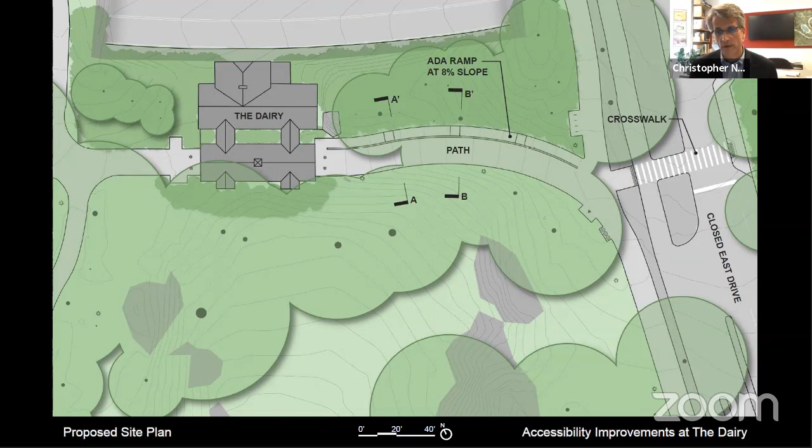It's regraded. You can see there's a 9-inch curb, shown as the double line just above the word path. That curb allows us to fluctuate the grades between either side, with landings at 30 feet. The handrail will be along that curb, and there'll be a handrail on the other side. I think the sections show it best.

Next slide. You can see again the 9-inch curb allows us to have differentiating grades between one side and the other. The accessible ramp actually moves a bit to the north. We don't, like it was historically, break the plane of the facade of the building with the path, and the handrails are outboard of the concrete curb.

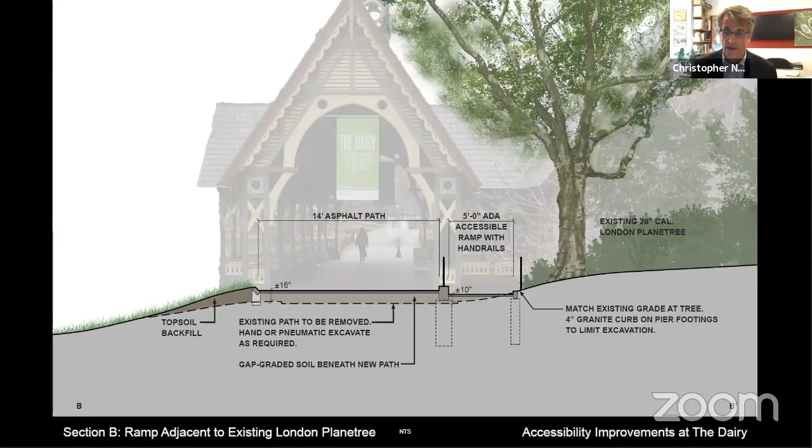Next slide, please. There is one existing tree. We actually have to raise the grade to make the whole grading work. There's careful consideration given to meet the grade right about where it is now, with attention to curbs on piers to limit excavation and the use of gap-graded soils to create that fill, minimizing the impact on the trees.

Next slide, please. Lastly, the proposal element: there's a historic reference we found in the 1870s annual report that clearly indicated the paving underneath the loggia was bluestone banding and brick. In the 1980s restoration, when the loggia was recreated, the fields were not done in brick but with asphalt hex pavers. Our proposal, next slide, is to replace the hex pavers with brick.

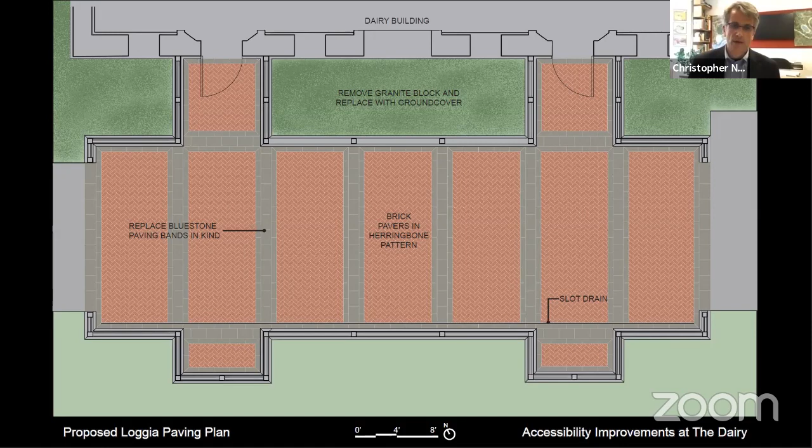We've chosen a herringbone pattern for its non-directional nature. There's precedent for fields of herringbone pattern and bluestone banding up at the upper terrace at Bethesda, and we believe it's a nice historic restoration of materials. That is the next slide.

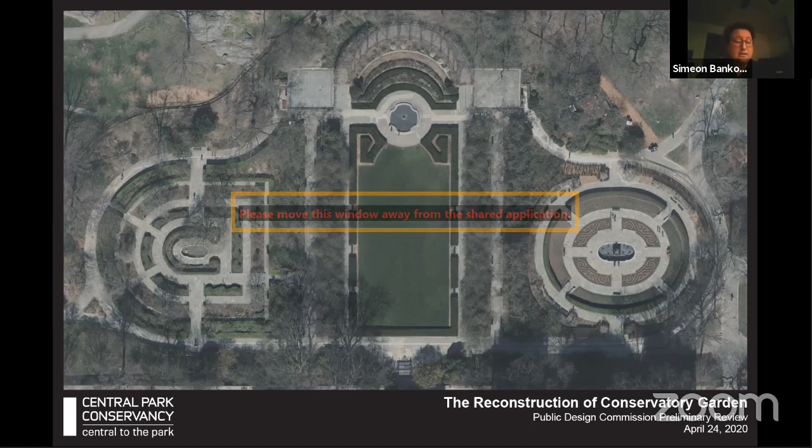Hello, I'm Simeon Bankoff, Executive Director of the Historic Districts Council, HDC, the citywide advocate for New York's historic places. As part of our ongoing mission for preserving these places and furthering the preservation ethic, we regularly review public proposals affecting historic properties to ensure that their effect will be beneficial and appropriate to the properties in New York City's historic physical character.

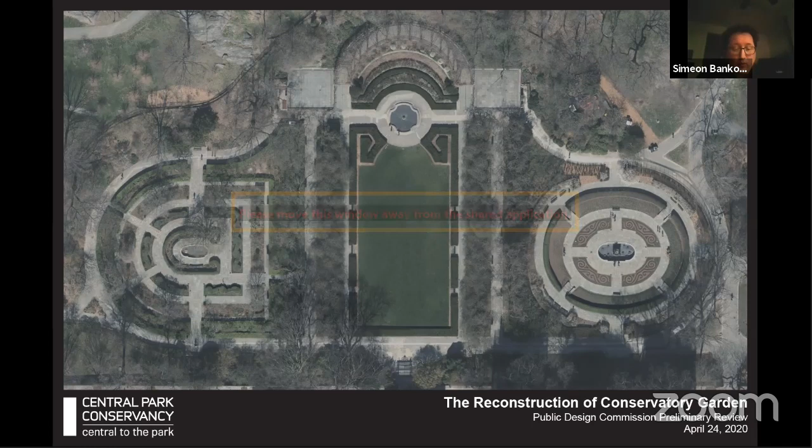I actually greatly appreciated this proposal, which was seemingly much more detailed than the one that was shown at the Landmarks Preservation Commission for the advisory report. So many of our concerns, while still needing to be addressed, are somewhat ameliorated. We were originally very concerned about aspects of the replacement in kind of the bluestone. I presume that in the actual plans themselves, there is a very detailed map of what shall be retained and what shall be reused, and the bluestone material being replaced in kind.

We don't have very many concerns about the dairy, though we do share aesthetic concerns with our colleagues about the herringbone. But our principal concern that remains is with the proposed changes in the French garden for accessibility purposes. We wonder if there might not be a more sensitive solution than a complete reworking of a major design element of the space.

There already exists a ramp to the north, which does require adjustment to bring it into code, but would seem to satisfy accessibility requirements. The shallow stairs into the central garden are a design element very much of their time from the 1930s, quite like the sunken living rooms of contemporaneous Art Deco apartments, and their wholesale removal will alter the experience of transition within the garden.

This particular element of the proposal should be really re-examined and rethought, as it will greatly alter the experience of traveling through this garden in its formality. Thank you very much. Thank you.

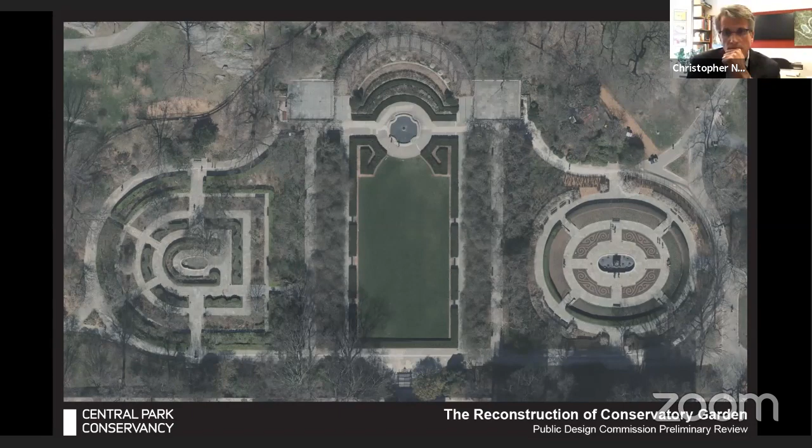I am supportive of the 4 ramps for the reasons of symmetry and the reality of grading to reduce the 4 inches necessary. I certainly support all the other changes and feel that there is sufficient historic data here to feel comfortable with what's being presented.

As far as the dairy is concerned, if you could possibly accelerate the images, I just want to point out this fire hydrant that's obsessing me. That'll be part of the scope to lower that to the proper grade. There we go, there's the hydrant.

So if you could provide us with what the intent is of planting at the bottom of the new ramp. So yes, there's the rock right there on the left. There seems to be some cobblestone. I guess the ramp is coming down and we'll replace that cobblestone. If we could see a little what the planting proposal is for that gap, what you're going to be looking at as a pedestrian on that ramp would be helpful.

I am not a landscape historian with regard to the paving that's underneath the dairy. There certainly is that language at Bethesda Terrace, under the Bethesda Terrace, elsewhere in the park. I honestly have to leave it up to historians as to what is most appropriate as a paving material. I don't consider it a path, I consider it a place. So while Olmsted wanted more simple materials on paths, this is a place, not a path, in my opinion.

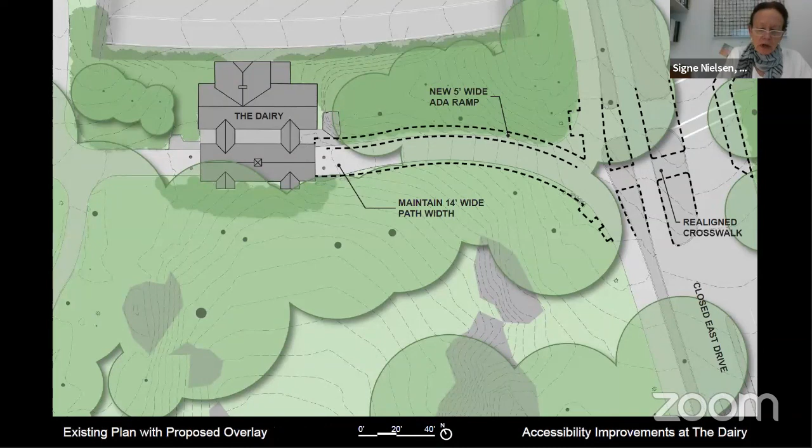We will now move on to vote on item 27506, construction of an ADA ramp at the dairy in Central Park. Again I will call roll. We've already articulated some conditions. Please vote approve, reject, table, or abstain.

Phil: Approve. Lori: Approved. Manuel: Approve. Richard: Approve. Susan: Approve. Merrill: Approve. Mary: Approved. And myself: approve. So let the record show that everyone voted in favor of this and it is approved with the conditions noted. So with that, thanks to everyone.